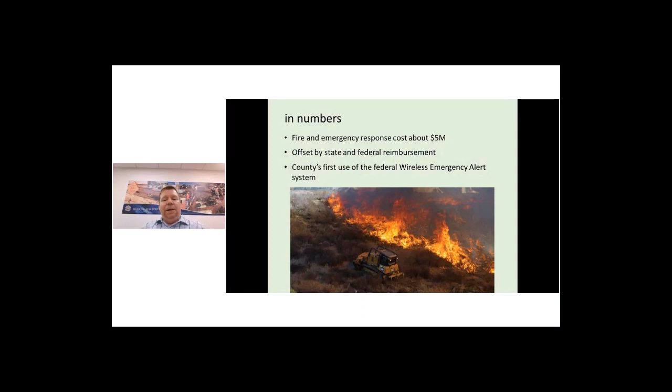This was the County of San Diego's first use of the federal wireless emergency alert system, so we're glad we were able to use this for the first time.

We started getting damage reports. We got this map—it's just an early map that shows the damage at the parcel level. What you see in yellow or light color are parcels with at least one dwelling unit that was destroyed. Any of the other parcels in blue is where you had damaged structures or other structures, not the primary structure, that were destroyed.

Looking at the parcels, at first glance you see a really large parcel here, which is actually an equestrian facility. So you only have one primary residence, but a lot of secondary dwelling structures like horse barns, etc. In this case, the primary structure burned down, along with a lot of other structures.

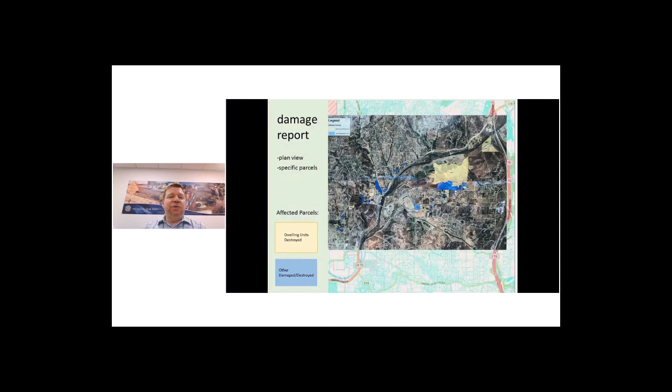We're looking at the parcel level here, so we're not getting the big picture just with this map. This was just the beginning, and now we're looking at the actual damage done by the fire individually in structures. You start seeing concentrated areas around the east, where most of the damage happened. In the central area of the fire, there are also some concentrated areas, and on the western portion, you have more isolated pockets here and there.

Just for reference, if you're familiar with the County of San Diego, this is Interstate 15, and this is State Route 76. I think that's about as much as this map shows.

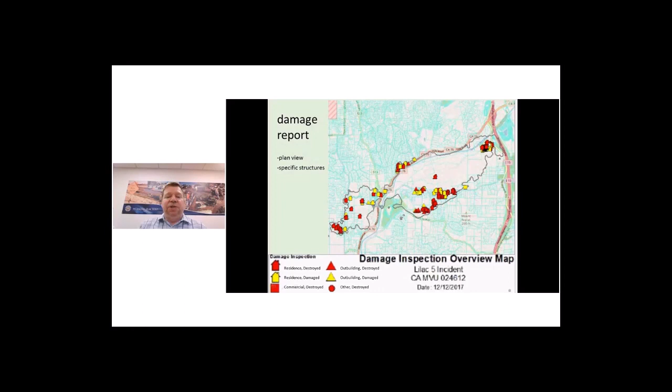If you don't have buffers between structures, the fire just jumps from one structure to the other. Unluckily, for this particular mobile home park, this was not the first time they were part of a fire. There was a fire in 2014 where the slopes over here burned down, and there were other casualties as a result of the previous fire.

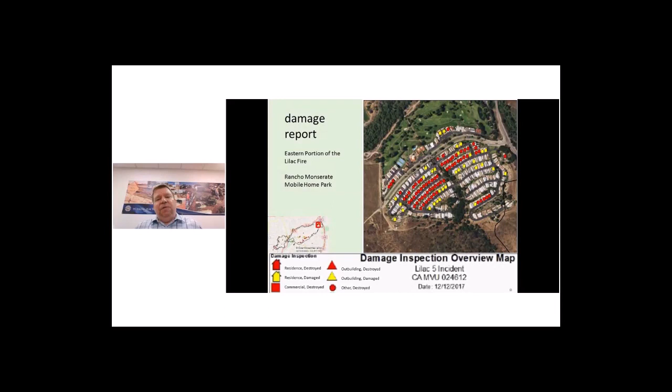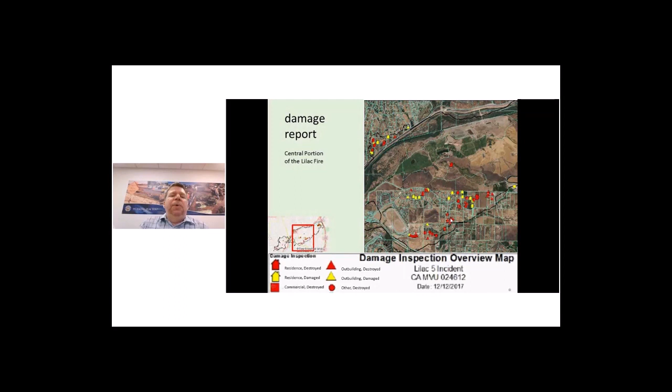Ultimately, this is the western portion. Here we see a lot more isolated pockets, and we did see a number of primary residences that burned down in here. It just happens to be, fires are unpredictable, but there's also topography that contributes and the amount of dry vegetation around those areas.

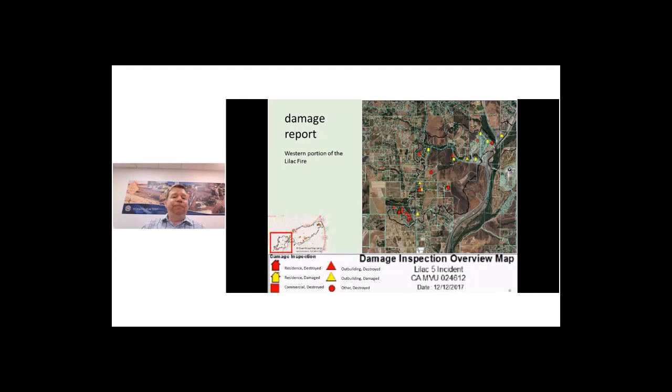Most of the information here that I'm providing has been published online. This was published on March 2nd of this year, and it's called the Lilac Fire After Action Report. You can download it, and it has a lot more information on other efforts that happened, including all the different fire rescue operations, all the different helicopters, all the different efforts from different departments and even agencies that were involved.

In this presentation, we're only focusing on the assessment of the burned areas to implement BMPs. We're focusing on the implementation, and we're focusing on the homeowner assistance. There were a lot of other efforts that happened that I'm not going to cover in this presentation, because that would take a number of hours just to go through. So let's focus back on our presentation.

The first portion is the assessment effort. There was field reconnaissance, and there were a couple of them done. One was done by land, driving a truck. What you have to remember is a lot of these roads were closed right after the fires, so they were only open to fire rescue operations. Of course, our County Department of Public Works was making different drive-bys to make assessments.

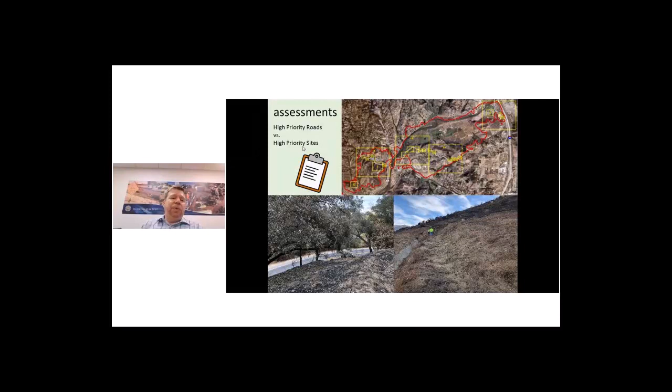So we split up the work into different components. One was high priority roads, which we'll call HPRs, which include the public right-of-way and anything that drains into public right-of-way. The other portion was the high priority sites or high priority structures, which are all on private property.

The first thing to take into consideration is, if we're going to be doing any walking on private property, we need to obtain right-of-entry agreements. So we need to do that not just for the high priority sites and structures within the sites, but also within the private property that is draining into the public roads.

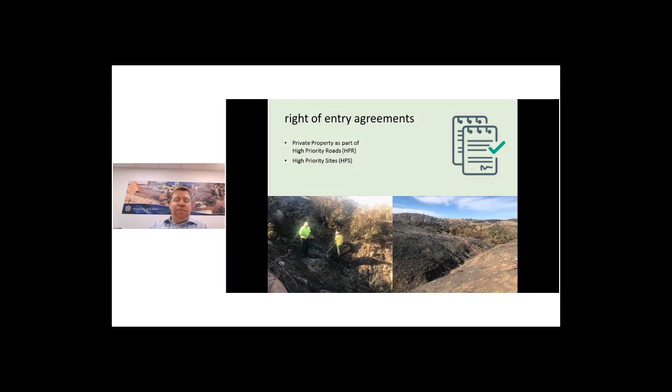One big challenge is that we didn't have the template ready, so we needed to come up quickly with the right-of-entry agreement to start knocking on people's doors and tell them why it's important to sign a right-of-entry agreement. It's not the most pleasant conversation you want to have with a property owner, but it needs to happen. They are basically allowing the county, by signing this agreement, to come in and implement BMPs that will protect the road and in some cases protect their private structures.

The other big component here is because the county doesn't have all the resources to do the work themselves, we have to rely on contracts.

So there were contracts for doing the assessments, and a contract for using inspectors when we implemented the BMPs. There was no contract in place for erosion control and hydromulch, so we needed to do an RFQ, request for qualifications and request for bids. We also needed a contract for traffic control, which was in place. So a lot of things that were needed were either in place, or in place but didn't have enough capacity on the contract, or in some cases we didn't have a contract avenue at all. So everything needed to be done really, really quickly.

And these are some of the BMPs that we considered. Jeremy Fantaroni is going to be covering in detail all of these, as far as what they do and where we use them. So it's a big menu of BMPs, but that's really what we're here to talk about.

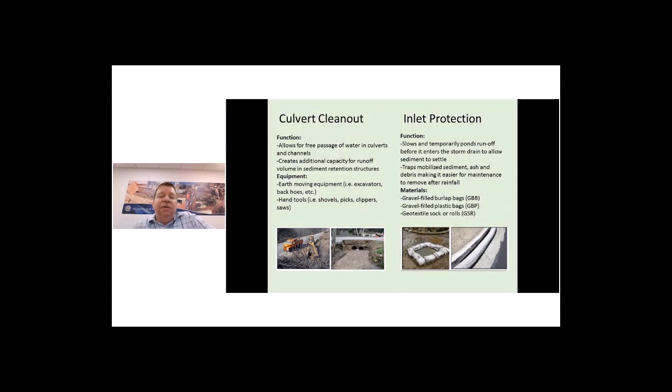Culvert cleanout was one of them. You don't think about this, but you find out that the culverts needed cleaning even before the fires. You also needed inlet protection in order to prevent any debris from going into the culverts as a result of any significant storm events.

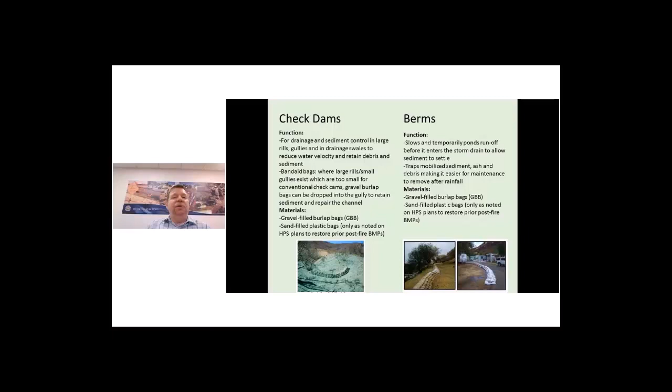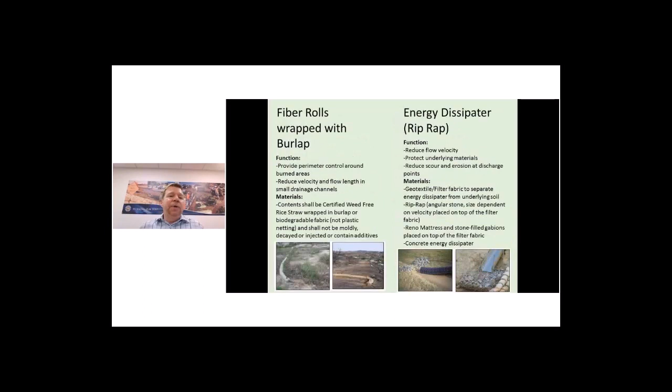You're going to see that check dams and berms are going to be widely used during these efforts through the photos. Chevrons and K-rails are interesting because you have to transport them, and there are different types of K-rails, so it's always a matter of choosing the best K-rail that fits your particular scenario. We also use fiber rolls and energy dissipators, and hydromulch was the one used for vast areas that needed erosion control.

So we split up the work into 3 areas like I described before. The western area along Olive Hill Road is one of them. In this case, you see that all the white ash is a result of the high temperatures during the fires.

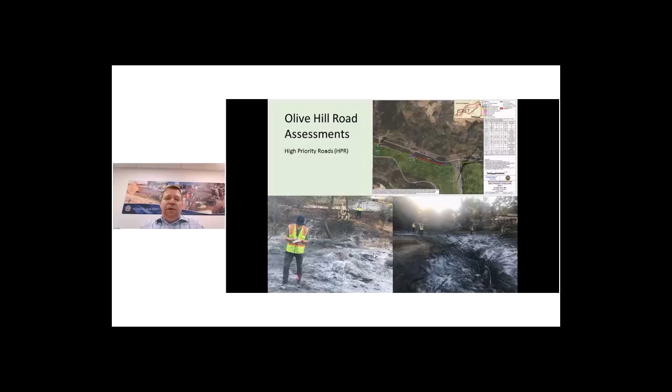Okay, we're having some technical difficulties here.

Some of the BMPs you're going to see, first, in order to assess the area, the important thing is to document everything. In order to come up with the BMPs, you have to start measuring things. You have to flag where you're proposing your BMPs, in this case, the downstream areas.

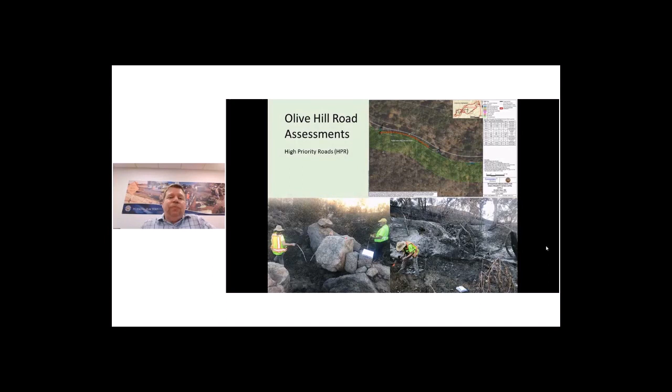There's also part of the lessons learned here, that even though we're doing all this work in the field under a crunch time because of threats of a significant storm event, we're realizing later on that we're starting to walk around sites that are not necessarily private property, but draining into public right-of-way. In this case, we found out that this massive area you see on the slide was part of an open space reserve that belonged to the state, a different agency in this case.

We also found out that there were some vast areas that were draining to roads. In this case, we implemented hydromulch along with other BMPs, such as berms and different sandbags. In this case, we used burlap bags.

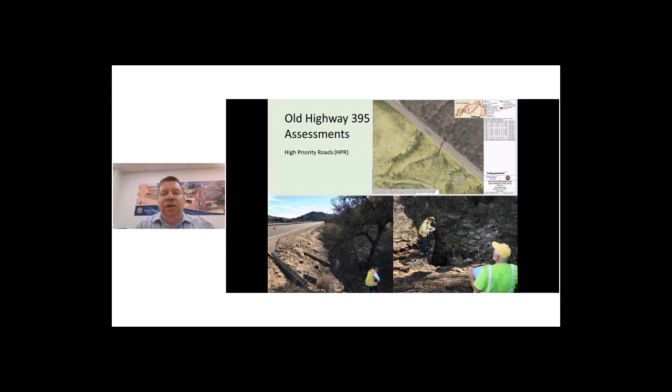We had along one particular highway, Highway 395, some steep canyons, so we really needed to do some hiking off of the road just to get to the bottom of the road where there was a culvert, in order to assess the location and be able to implement some BMPs.

We were at this location and were asked to move by our sheriff. In this case, they were doing some bucket drops of water because the fires were still active, so we had to evacuate immediately from what we're doing. So there's sort of some time constraints in the efforts in the field. There's a lot of moving parts, and we're part of that.

And like I was talking before about this mobile home park that sustained casualties in a previous fire, what we did find is that the BMPs from the previous fire were still there, and they were still effective. So we took a look at them, and we just provided some reinforcement to some of them.

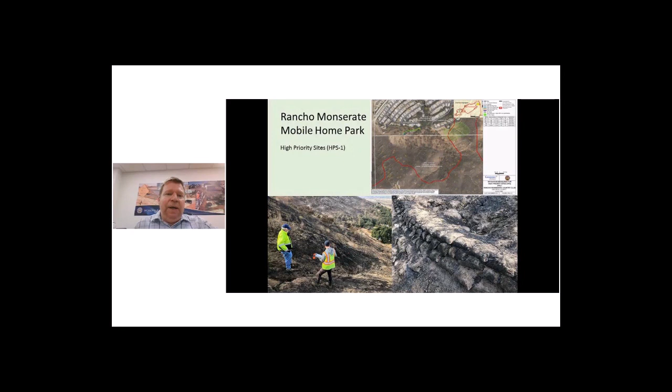We're moving now into the private structures, trying to protect a few of the private structures that are likely to sustain some damage in the next significant storm event. So we provided some hydromulch and some other fiber rolls in order to protect the houses.

In this case, we had a subdivision there. You don't see it on the top because Google Earth at the time of the fire was not updated, so all those brand new single family homes were right there. One lesson learned is that even though you see nothing there in Google Earth, it doesn't mean there's nothing there, because there was a subdivision and I was very aware of it, including during the time when the fire was being reported live, and even the reporters didn't know during the live broadcast as to what was going on and whether there were any people there or not.

So one of the big lessons learned, you're always moving along, you're always getting more information. The right-of-way agreements were always mutating. In this case, some areas were expanding, and we were constantly either getting more right-of-way agreements or visiting more properties to get more right-of-way agreements.

One lesson learned for me is that if you have an iPhone, you're taking a lot of photos, there's a way that you can find out where the photos were taken, because after a few sites, everything starts looking the same. So documentation is key. If you see that circle there, I zoom in into that, and then I see, oh, these are the streets where I took all those photos. So that's one tool that you have with the iPhone. I'm sure that Android also has a similar feature that you can find out where your photos are taken.

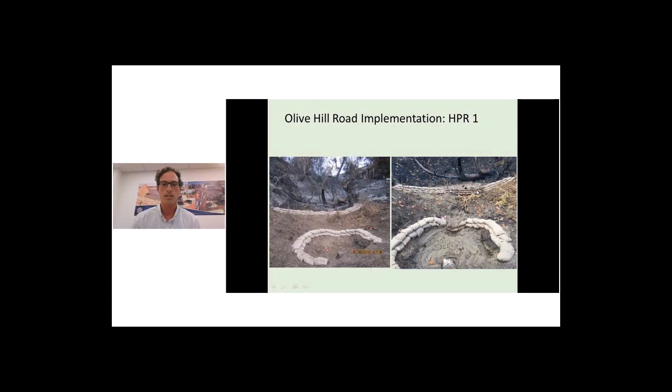We also installed a check dam structure to try to slow down the water and catch some of the debris. From that rain event, this structure held back quite a bit of debris and sediment from entering, and we were able to keep the culvert clear, so water was able to go under the road and not flood the roadway. After this storm event, we had the crews come out here, clean the area, and eventually hydromulch this area.

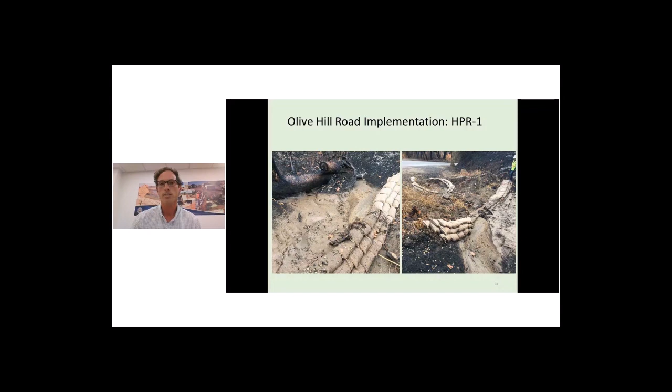So as we're going along Olive Hill Road, as you can see, this is a really pretty road, but these slopes had vegetation and the fire destroyed all the vegetation. You can see all these pre-existing conditions to this area, so this is obviously of concern for debris flow going onto the street.

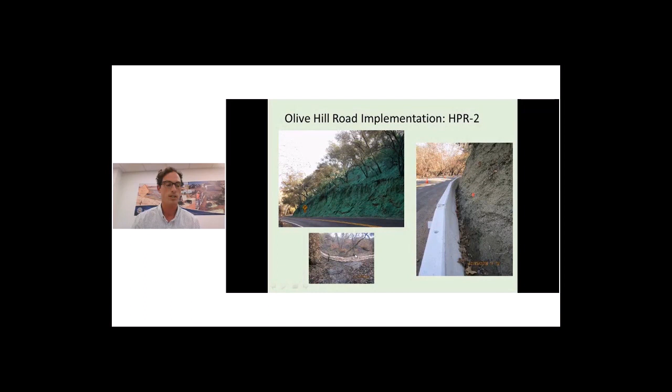So some of the BMPs we implemented were hydraulic mulch in this area. This is one of the areas where we also did some K-rail installation, and then in certain drainage channels we installed check dams with gravel bags.

The hydraulic mulch application we went with because this is a fire is a little different than a construction site. We're really concerned with debris and ash, and even when it's windy the ash can become an issue as well.

So we did a two-stage approach for our hydro mulch. Step one consisted of a heavy tackifier mix. The idea was to use this heavy tackifier mix to mat down the ash, and then we came back right after the contractors installed the heavy tack mix.

The second step was a more traditional 2,000 pounds of mulch with 4% tackifier per acre. So even though it's a two-stage process, we actually achieved cost savings because we didn't use as much of the heavy tackifier mix, and it was very effective.

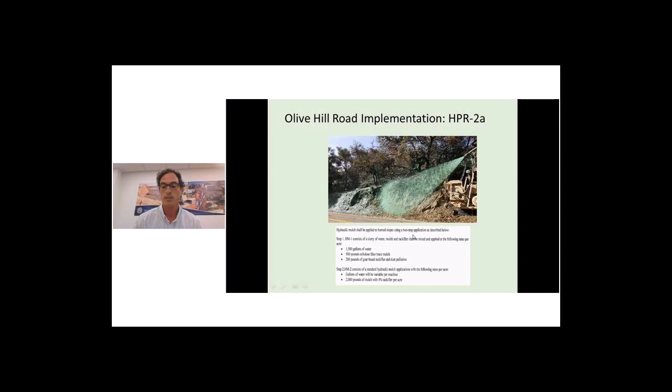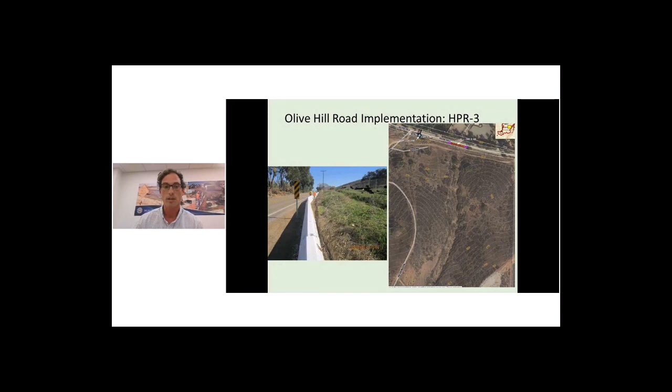Here's Olive Hill Road. As you can see, there's a large drainage channel coming in—this was the one René spoke about. That was Caltrans property, mitigation property, so we weren't able to get on this area. But we did install some K-rails right at this location. As you can see, there's actually a vegetative buffer that didn't get burned, which also helped minimize sediment from entering the road.

Here's HPR 3A, again along Olive Hill Road. Here's a little different application. There's a large burned area upslope of this V ditch. The V ditch had tumbleweeds and various sediment in it, so we had crews come in and clean out the V ditch, and we also installed check dams to try to minimize sediment from entering into the storm drain system.

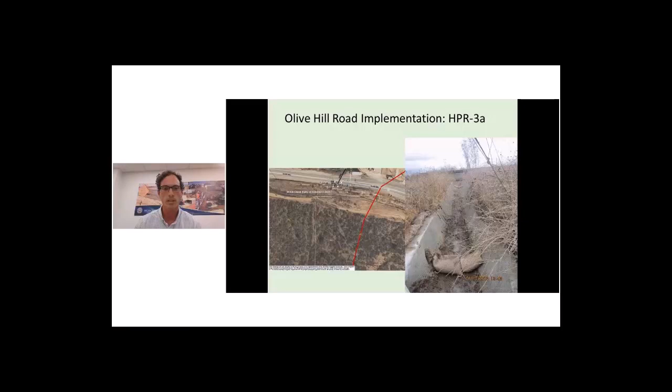In the past we used a variety of things, including poly bags filled with sand. We found that after the poly bags degrade they become messy, and the sand just creates a messy situation. So we decided to go with burlap gravel bags instead, and we did this structure right here.

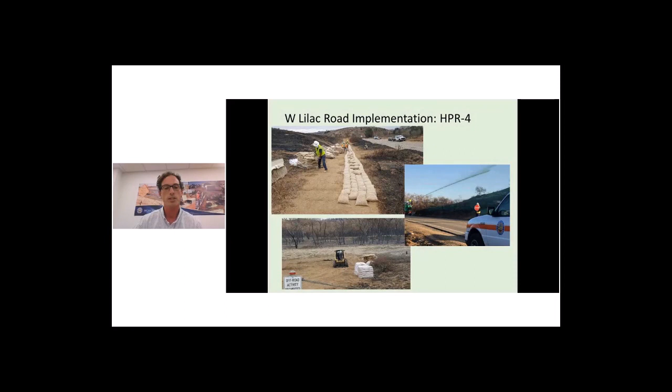Also, for this site, once we installed all the structures, we went and hydromulched as the last step.

Here's HPR 5. As you can see, this is the largest structure we built in the past. Some of the check dam structures went 6 bags high, some 5 bags, but this time we didn't want any structures to be larger than 4 bags high.

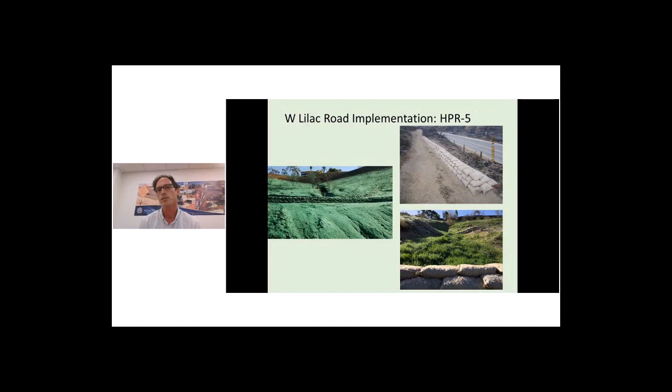Here's the HPR 6 site. On this site we used a different approach, called the Band-Aid approach, where we use gravel bags in the existing rills and gullies in these areas. We filled some of the gullies with gravel bags to try to minimize additional erosion. There's obviously an existing condition here where erosion is happening, and the fires can exacerbate that, so we want to minimize any further erosion to these rills and gullies.

This is HPR 7. This site has just over 2 acres of hydromulching that we did here, and we also had a large drainage channel coming into this area at the bottom, where we decided to install some quarter-ton riprap with the geotextile fabric underneath it to minimize any further erosion to this area.

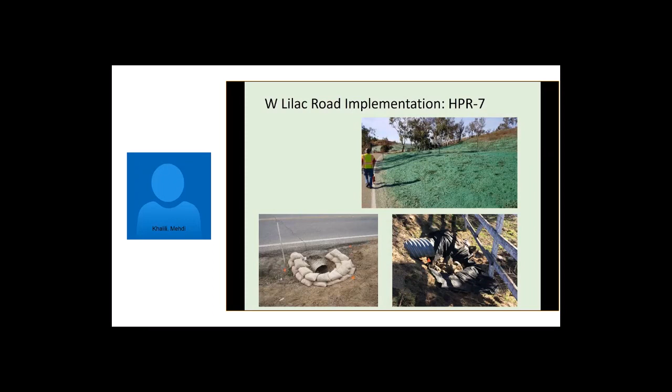This is a good example of some inlet protection that we did along the roadways. We had to be really careful, and had to reassess a lot of these areas to make sure none of the gravel bags were encroaching on the road. We wanted to keep them off the shoulder, since there's a lot of bikers and traffic, and it's a tight road to drive on. So we kept all the structures off the road and the shoulder for the most part. We also made sure the height of the gravel bags was lower than the road, so no water would get diverted onto the road and cause a potential hazardous situation.

So this is HPR 8. This is another example of some quarter-ton riprap that we installed. There's a large drainage area above this, and there was already some existing erosion going on, so we wanted to shore this area up with riprap. We also installed hydromulch in this area.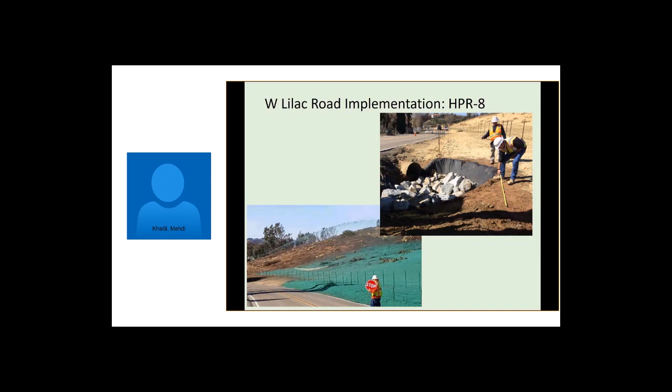So this is HPR 9. In this area we had our roads crew - actually with a lot of these installations, our county roads crews did the culvert cleanouts and cleaned up the swales, any existing debris or sediment in the channels we identified. Prior to installing any of these, we had our road crews come clean them up. That gave us extra capacity for the devices and made it easier for us to install them.

This is an example of a check dam installed in an asphalt drainage channel. Again, we want to keep the end of the check dam out of the road and off the shoulder, and make sure the weir at the low portion of the check dam was lower in elevation than the road, so we don't kick any water into the road.

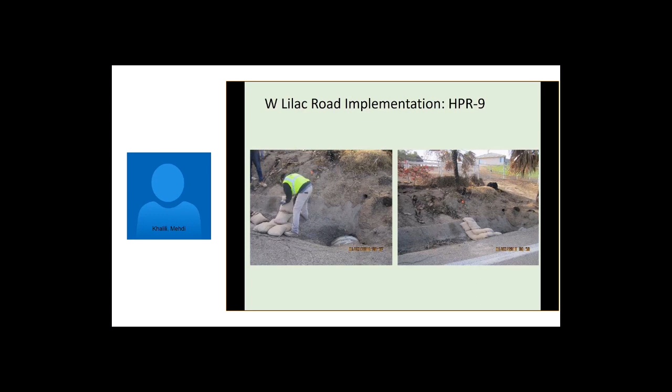So here's HPR 10. On the left, you can see we installed some riprap. This was a large drainage channel and a difficult one to access. We did our hydromulch, but had to do traffic control with a lane closure to get the riprap in here. This took about half a day to get the quarter-ton riprap and filter fabric set for this installation. This was also a large hydromulch area.

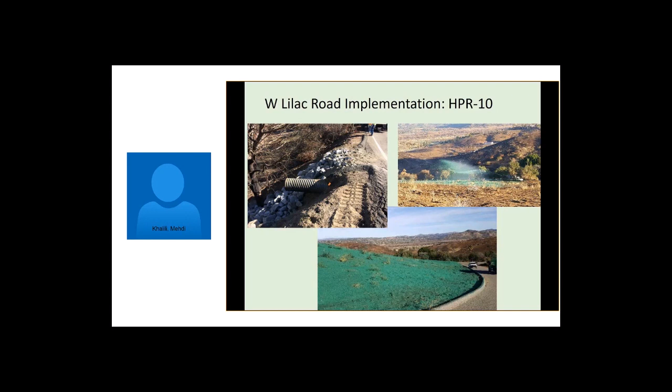I think it was over 7 acres possibly for this area - I'm sorry, this was three acres, and we used 13 cubic yards of riprap.

So this was HPR 11, as we're driving up West Lilac Road. As you can see, those are some avocado trees that look like they partially survived the fire. We couldn't get far up with our truck, so we did a buffer strip - we were able to go about 25 feet and install the hydromulch. We also installed gravel bags, shown on the bottom right picture, to slow the velocity of water going into the inlet at the bottom, and installed check dams along the swale line. Again, we had the road crews come clean the swale so we could install the check dams.

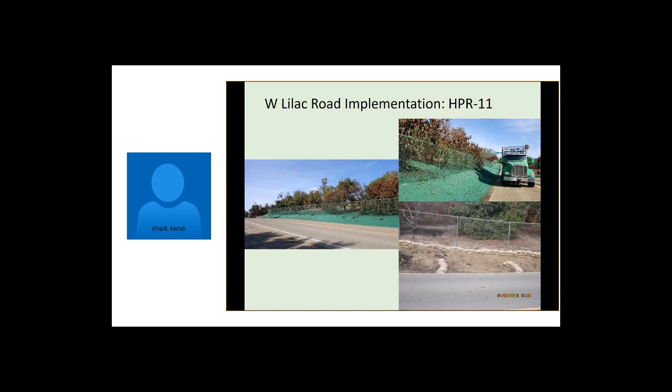So this was one of the high priority sites, HPR 12. Prior to the rain event, this was identified as a location we wanted to get to before the rain. We put gravel bags along that wall to try to stabilize it as much as we could, and also installed an inlet protection device prior to the culvert. And you can see what happened in the rain event.

It looks like there was some channelized flow that went through the hydromulch that was applied, so that wasn't too effective and kind of overtopped the structure we built. It was a messy situation.

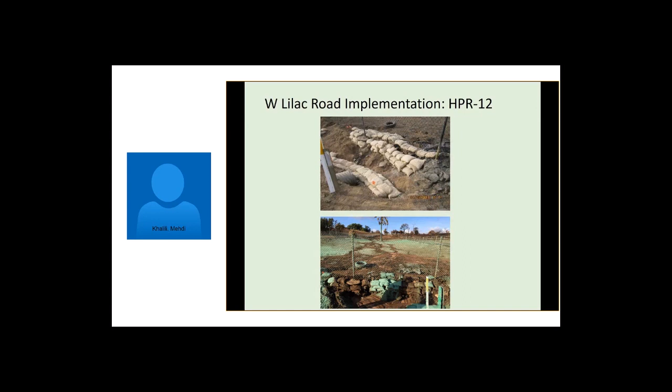After the rain event, we came back and cleaned the area out. We put riprap prior to going into the culvert, and installed a new 3-bag high gravel bag check dam. This is one of the few sites where we actually did fiber rolls along the contours of the slope to try to slow the velocity of the water coming down.

You can see this was after some subsequent rain events - you can see all the vegetation growth. There's probably like 2 feet of vegetation behind the check dams, and it was effective for the next storm events that hit this area.

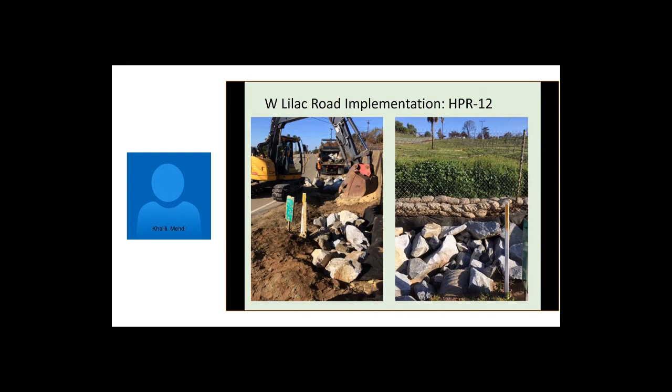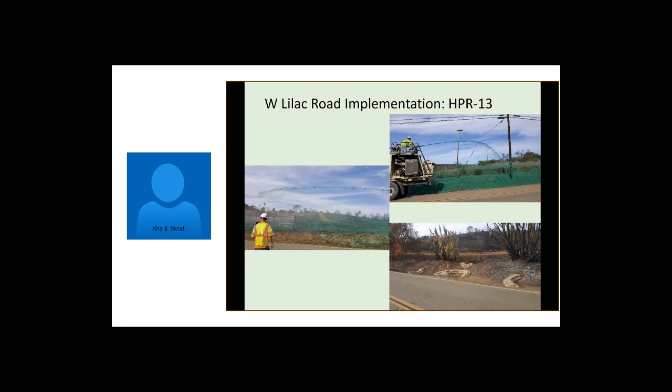So this is HPR 13. As you can tell, this was a large area where we put more hydromulch. We also installed some inlet protection devices and check dams prior to going into the inlet.

So this is HPR 14. Again, we did inlet protection for that culvert, and then we did a check dam type structure about 2 bags high above it to try to slow the velocity of the water. That was a large burned area above it.

I guess we could have used fiber rolls potentially to do this as well, but our crews had gravel bags, burlap gravel bags, so we just utilized them. It was more efficient and quick to implement. As you can see, the big cactus type structures.

For any of these structures, you have to make sure you have good professional judgment when you're installing them. That's why typically the approach was to have a QSP, a qualified SWPPP practitioner, along with the erosion control crews. The QSP would ensure that the structures were built correctly, and also keep track of all the material.

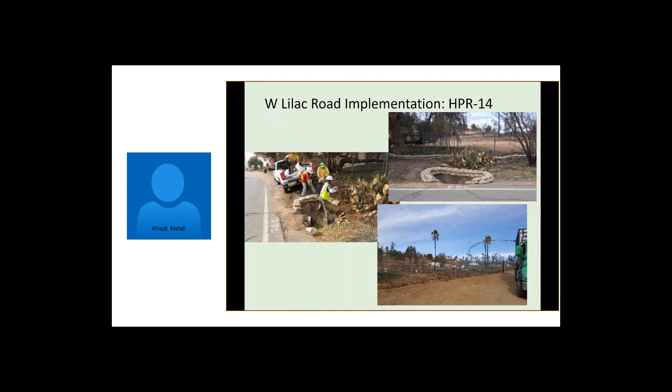So this is Old Highway 395. There are existing culverts that go under this road. We wanted to protect the culverts through inlet protection, and this just gives an idea of how these areas are hard to access. You can see the erosion control crews and our QSPs mobilizing to these areas, which was challenging.

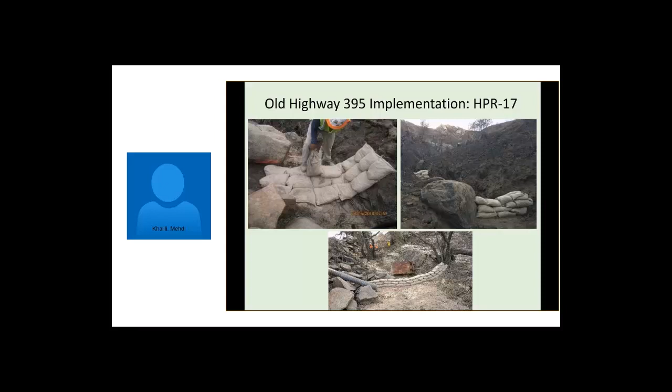You can't see it, but the house is way at the bottom. So this woman's probation crew hiked up all the gravel bags, staged them along these areas, and then also went and installed them all. So this was quite an effort and a good coordination.

You can see that some of this area in particular was hit by a previous fire in 2014, I believe, so you can see the existing gravel and the existing structures there. We used the existing structures and beefed them up. We took bags and refilled them with some of the sand there, and it was a really good effort. So I'm going to pass this along to Mehdi now for the Erosion Control Center.

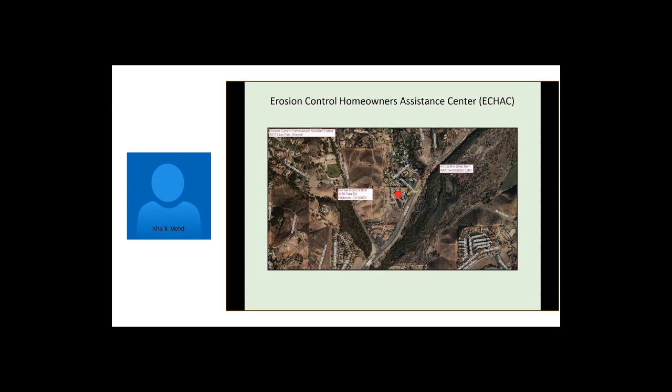This is a closer look at the Bonsall Road station.

This shows the layout. People would enter through the entrance, park in the parking area, and then the red arrows show the flow of customers and constituents that were being assisted. We had set up a temporary tent, which is labeled as the check-in area.

Next was fiber rolls and sandbags. The customers had the option of taking empty sandbags and filling them up with gravel or sand at their property, which would make it easier for transfer, or filling them up on site. Although anytime we were not assisting customers, we were busy filling up sandbags so the customers wouldn't have to do that themselves. We also provided local seeds for them to use.

One morning when we arrived to open the erosion control center, we realized that the storm last night and the strong winds had blown away our temporary tent. So our road crew kindly allowed us to move our check-in area to the permanent tent that they had set up across.

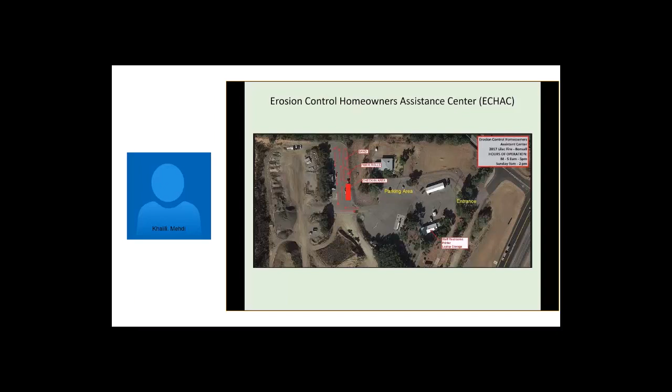This shows us trying to set up our new check-in area. Our erosion control center was open 66 days, 25 rotating staff assisted staffing the road station, from flood control, watershed protection, private development, construction, inspection, roads, wastewater, and CIP sections.

We were open 7 days a week, and we assisted about 150 property owners. Now, the property owners had two options to receive assistance. Any property owner within the red main fire area perimeter would be entitled to receiving a certain amount of BMPs, best management practices, which included 50 sandbags, 4 fiber rolls each, coming with 7 stakes, and 1 bag of seed.

If a property owner believed they needed more material, we would happily go to their site and do an assessment, or even if they didn't need more BMPs but just simply needed some professional advice, we would visit their site after them giving us their written consent through the form that René mentioned earlier, and we would give them verbal advice and also provide them with a drawn-up erosion control plan on how to implement it.

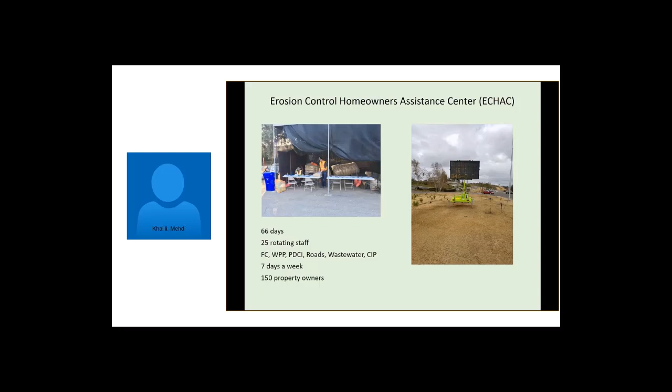As you can see, the yellow pins show every property that received assistance from us. There are properties that were affected by patch fires outside of the red main fire area. This shows how far the fire can spread.

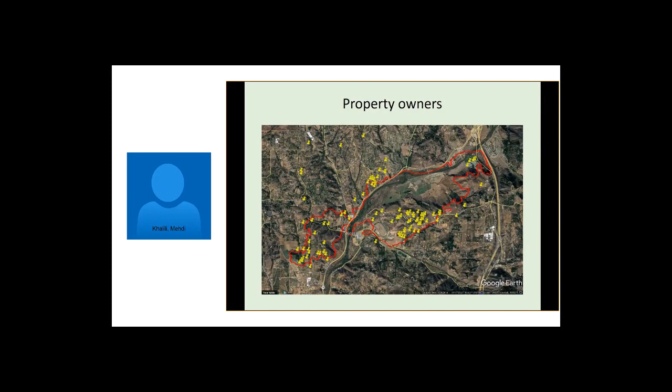The BMPs that we used included fiber rolls, sandbags, and a combination of local seeds that we provided to the customers.

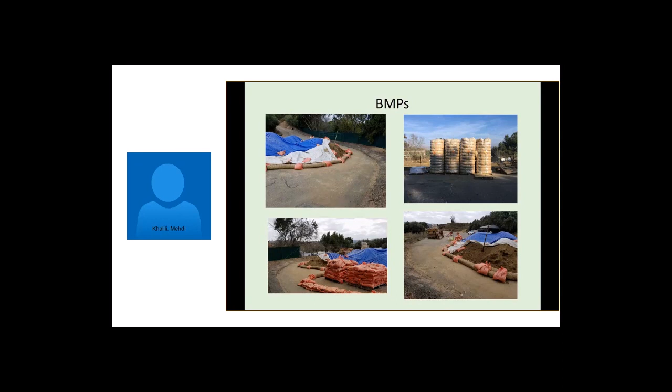For this last slide, I'm going to turn it back to René. Thank you. So lastly,